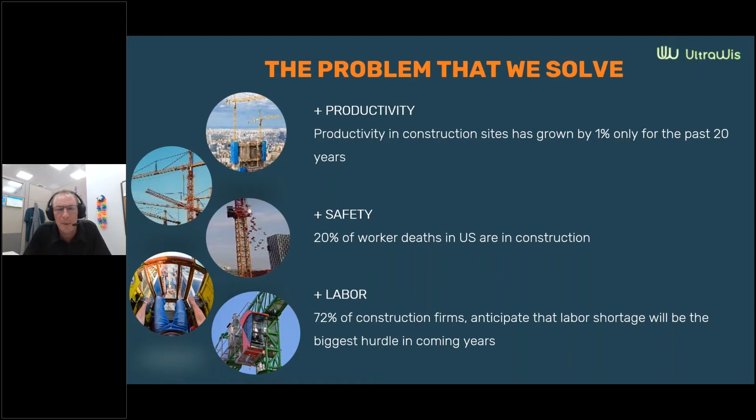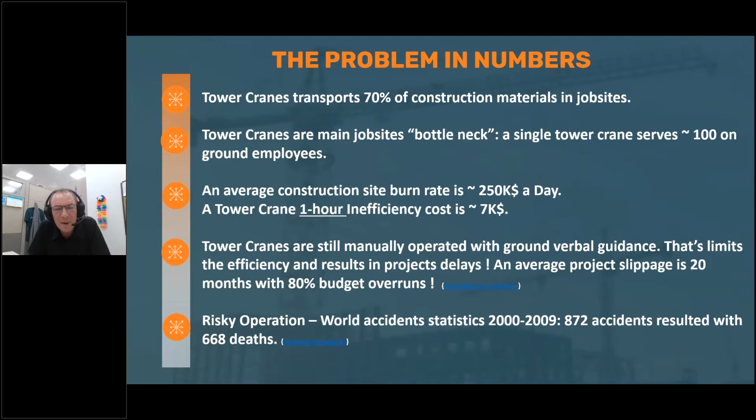So a bit about the problems in numbers: tower cranes transport around 70 to 75% of construction materials, and it's a bottleneck inside the job site, because once it's occupied, you have between 20 to 40, 50 people on the ground waiting for it to deliver. An average construction site burn rate a day is around $250K, depending on the size of the job site, but this is more or less the numbers. Inefficiency of crane costs around $7K. And the last thing is that we're trying to decrease the numbers of verbal guidance, because less verbal guidance means less errors and less mistakes.

So our solution is called WideSite, and why it's called WideSite - because it's actually not only for the crane, it's from a logistics point of view, and it touches all the job sites. So what do we have here? As you can see, we have a sensor, a special sensor unit. It's not a regular one. It comes from the Apache actually, these sensors, and it has a special stitching pattern.

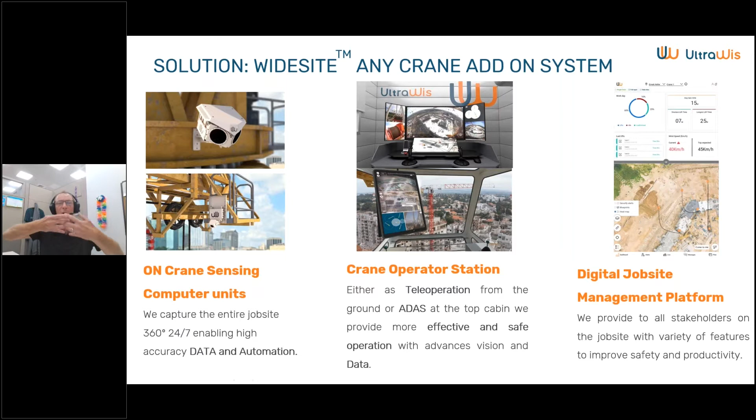That means two cameras looking at the same place, and only if they verify the same picture, only then it allows you to show it and tells you that it's the right picture. It has a wide field of view, 170 by 130, so that covers most of the job site. As you can see, we have another sensor - one sensor is looking at the hook at all times, and a 3D modeling sensor. I will show you what we do with it. So we are an add-on to the crane. We capture the entire job site, 24/7, 360 degrees, and we actually give you accurate data and automation.

Now, there are two modes of operation. You have remote operation, which is definitely the future, but there are regulatory considerations. We are working with TÜV in Germany now so that they will accept it.

It takes time, obviously. And we have the ADAS mode, which actually comes from the mobility world. The idea is to take all these capabilities and help the operator in the top cabin do his work faster and decrease his workload. We wrap everything up with an application that gives you every metric you want for all stakeholders on the job site, from productivity, efficiency, safety, idle time, and more.

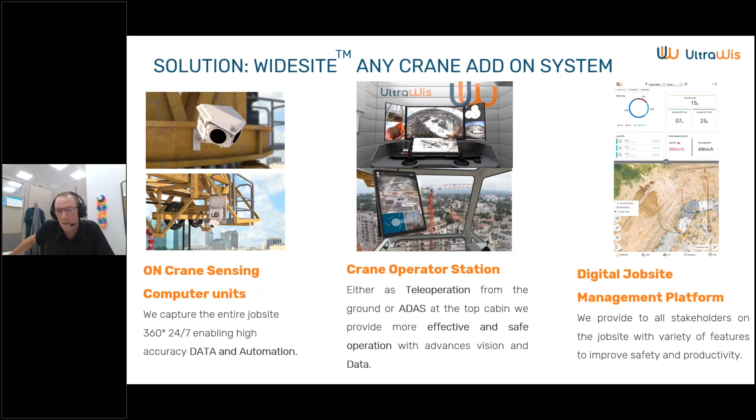So this is how it looks on a crane. It's actually 2 to 3 hours to assemble. In construction, they usually use the crane for 18 to 24 months, so it's 2 or 3 hours to set up, and then you have it for the entire cycle until you finish building.

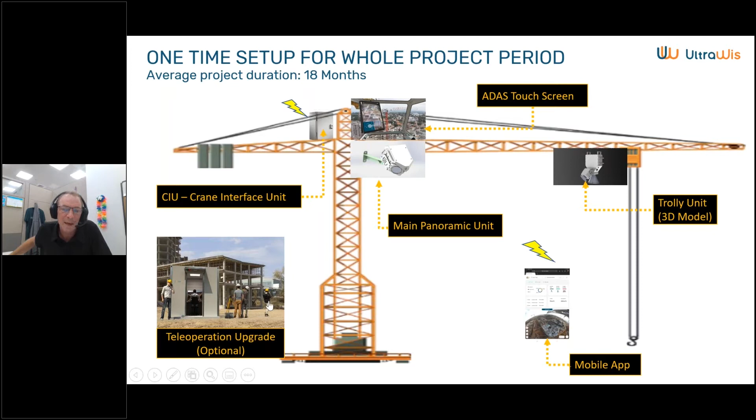As you can see, it's pretty easy. We just add a sensing unit, a trolley camera, and the 3D modeling, and that's it. It's wrapped up with an application. This is the top cabin solution. And if we want, we just take a fiber optic cable down, and then we have remote operation.

So now I want to show you a bit of our capabilities. Since we're talking about innovation, you have to be innovative as well, so we made this presentation in 3D Unity. Let me share with you what we can do.

As you can see, it's a regular job site with three cranes: two regular tower cranes and one luffer.

Now you will be able to see the sensing unit and how it looks exactly on the screen. This is our sensing unit, the 3D sensor and the hook camera. We have a tail camera so from remote you can hear and see everything going on, and a wind sensor so the operator knows the wind speed and direction.

This is the ADAS with all the symbology and graphics, which we'll talk about. And if you want to work remotely, here you are—you have all the screens and data you need, you can hear and see everything, and with the symbology you work even faster and safer.

This is a real job site, by the way, 10 minutes from Tel Aviv, that we built from the ground up, 72,000 square meters. Here you can see everybody is aligned—he knows what he needs to do, where he needs to pick up, and where he needs to drop it off, so I can avoid open shafts, people without helmets, and other hazards along the way.

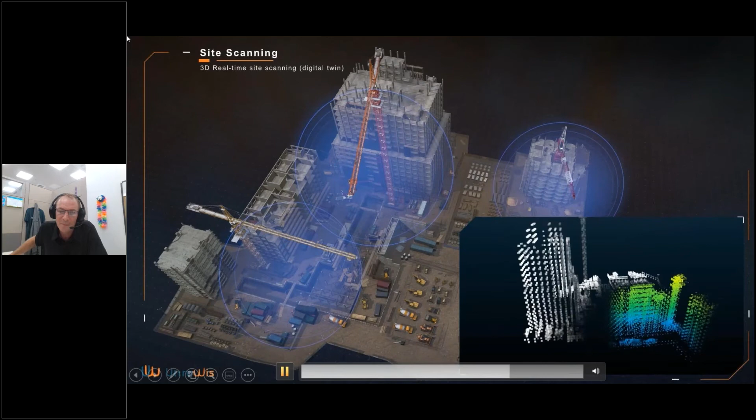We're also using AI for safety. As you can see, we can detect and send alerts to the safety manager about workers without helmets, open shafts, open piers, and any other vehicle that's in danger. And we have our own anti-collision system—it's not via radio, it's visible, it's via AI.

This is a real teleoperation system, a beta one we built, 70,000 square feet in Kiryat Ono. As you can see, we give the operator all the details he needs to work faster, because when he sits 100 meters or 80 meters up, what can he really hear or see? But if I give him the right symbology, the right graphics, the sound, and everything, he doesn't need to go up—he can do a better job sitting in an air-conditioned office in a good chair.

And that's why we can open this up for women, for youngsters, and for a new generation of operators.

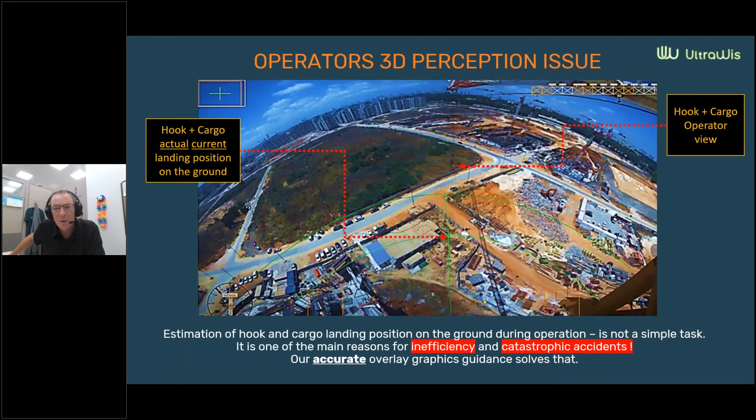So this is what I wanted to talk to you about. This is our ADAS, which stands for Advanced Driver Assistance Systems, coming from the mobility industry. As you can see here, we give the operator symbology so he doesn't need to think too much. We want to decrease the workload of the operator.

So what we have here is the wind direction and current wind speed. We have the height of the hook from the ground. We have how much he has on his lifting, updated every minute. This is for the hook.

So if it goes right, he doesn't need to think about where it will fall. We already tell him where it will fall because we have a dedicated camera on the trolley that shows every time what's going on and where it's going to land. If he goes left, it shows where it will be. And this is the range, the maximum range of the crane's possibilities, so if somebody wants something here, he will not be able to reach it.

Okay, this is our anti-collision system, how it looks from upstairs, the top tower sound and view. Because if you're working from a remote, or even from the top cabin, you still need to hear and see what's going on in the back.

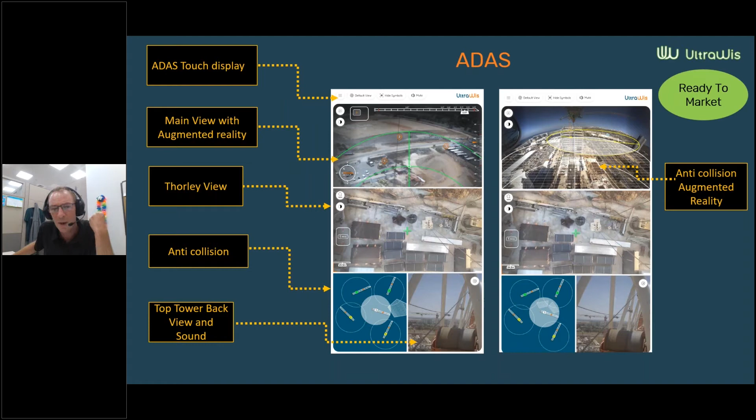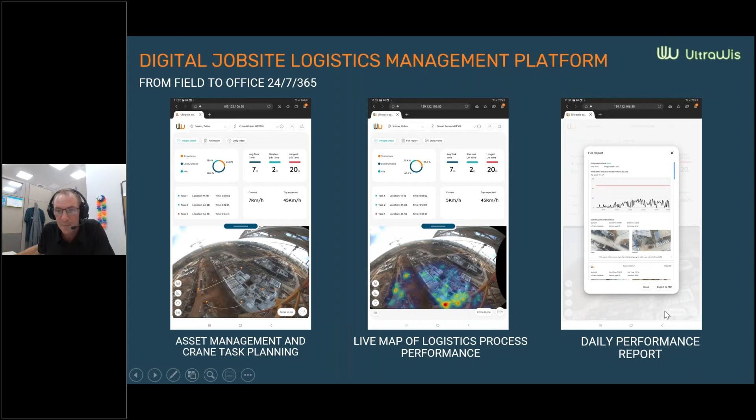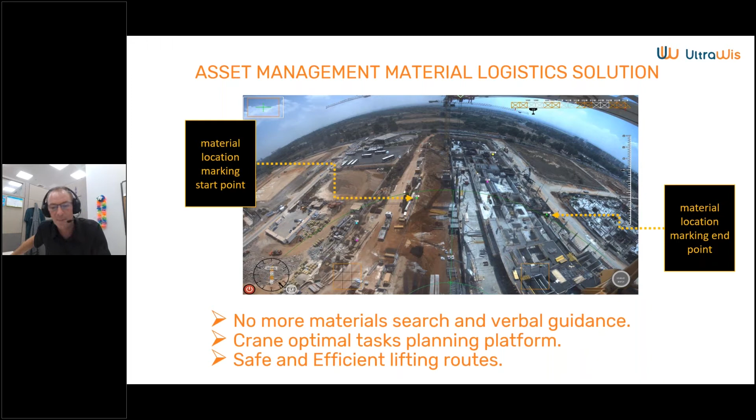One of the main problems we encountered on job sites is the material. When materials come to the site, they usually arrive 10 or 14 days before they're used. So you have the guy downstairs writing that it came and sending it in. We want to have a logistics, site-wide solution, so we deal with the material even before it comes. We integrate with ERP, Procore, Autodesk, whatever, and we know it's supposed to come. Let me show you how we solve this problem.

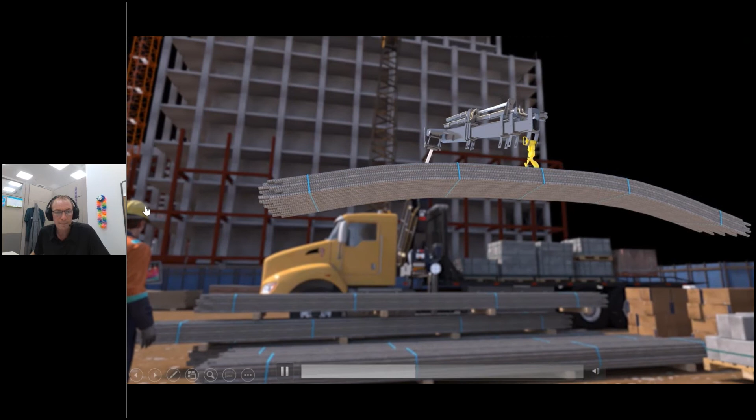Materials are coming to the site, as you can see. They always have a barcode. So through our iPad, tablet, iPhone, Android, whatever, you scan the barcode, and then we know where it is from GPS. We know what it is. We know what the quantity is, and we know where it's supposed to go.

Now it shows where it is, what it is, and where it's supposed to go. This is the first step for automation tasks for the crane. Now we send it to the guy in charge of all the material and the planning. So he knows it's arrived, he knows where it is, he knows what it is, and he just has to send execute to the operator and tell him if it's going to be first, second, or third. Simple as that.

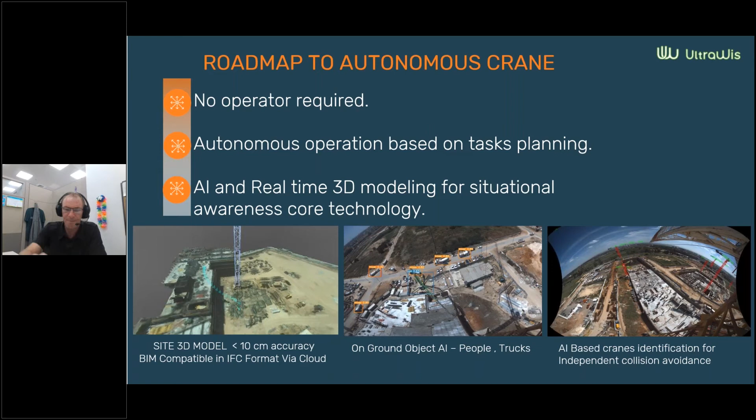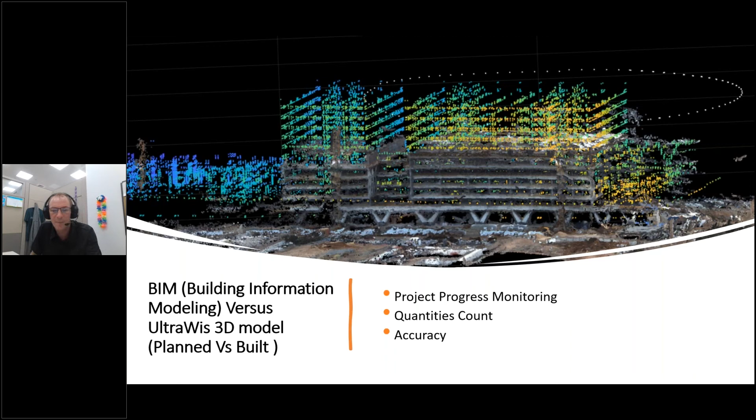The benefits that you get out of the system and our solution is real-time decision-making data. We improve the workflow. We decrease what the operator needs to think, because we give him all the symbology. We will tell him where the hook is at all times. He doesn't need to think where it will fall. You can start work from the office. You don't need to be on site at all. If we have 5G, we can integrate through it, and we don't need fiber optic. We can control it from the office. And once we have all the graphics and symbology, there are fewer errors. We minimize errors and minimize verbal guidance. And as I said, you have an ergonomic station with an air conditioner where somebody can sit.

And first of all, it's much more convenient, much more comfortable. You work better, and he doesn't need to go upstairs half an hour and go back half an hour on lunch, and then go again half an hour and then go back half an hour. So I save only on that between one and two hours a day.

And as I told you, our technology is based on military upgrades. We are a spin-off of Elbit Systems, like I said, and this is our sensor. It comes from the Apache, and we're using the same symbology that the Apache uses to land in an unknown area. This is how we use the symbology. We have 14 patents from them and 4 more that we just registered under our own name in the United States, Canada, and Europe.